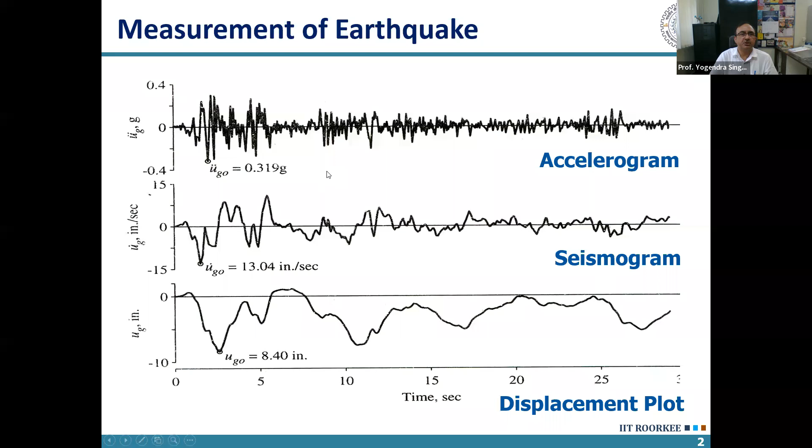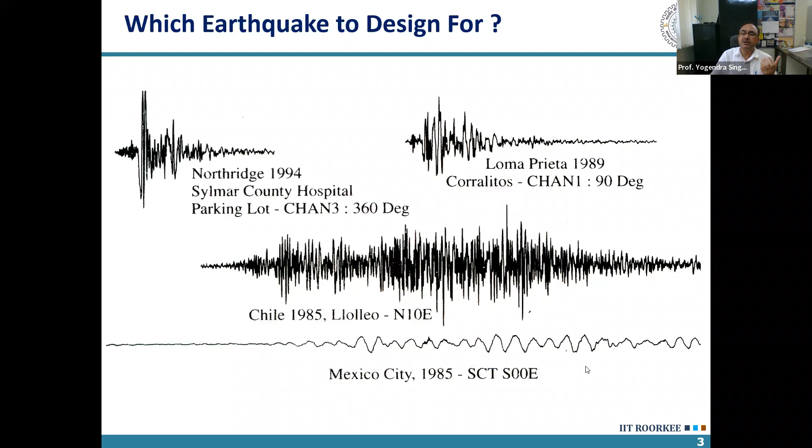So three important characteristics of ground motions have been identified. One is the amplitude of the shaking, the peak ground acceleration, or the peak ground velocity, or the peak ground displacement, because the amplitude is causing the magnitude of the force acting in the structure. So the magnitude of force depends on the peak ground acceleration. Similarly, the peak ground displacement results in the maximum displacement, which will occur in a flexible structure. So the amplitude is important.

Then frequency content: if the frequency content is such that our structure lies within the predominant frequency content of the earthquake, then the damage will be more. And lastly, duration. This is also important because damage is cumulative. When any structure is subjected to earthquake shaking, every spike in the acceleration is causing some damage, so every cycle is causing some damage to the structure. That damage goes on accumulating, and the accumulated damage will depend on the duration of the earthquake. So duration of earthquake is also important.

In most of our analysis, we do not consider the duration. Only in time history analysis, especially nonlinear time history analysis, does duration come into the picture. In other analyses, duration does not come into picture, and there we account for the amplitude of shaking and the frequency content.

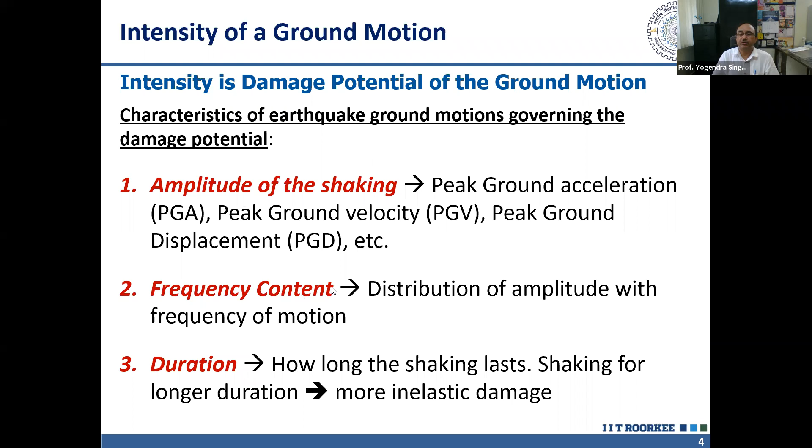These two parameters, the frequency content and amplitude, can be represented by the response spectrum. A response spectrum is nothing but a plot of the response of a single degree of freedom system subjected to earthquake. Some of you may be familiar with this single degree of freedom system, where we have a mass and either a spring or a single column. It represents a single story building where mass can be lumped at the top, and the column represents the stiffness. This column can also represent the damping, or the damping can be represented separately using a dashpot system.

And it is subjected to U double dot G. G stands for the ground, and U double dot stands for the second derivative in time.

So it is ground acceleration. When it is subjected to the ground acceleration, the mass undergoes some acceleration, and that acceleration is responsible for the inertia force in the mass.

So the force acting on our structure will depend upon U double dot, which in turn depends on U double dot G. But in our design, we are not interested in the inertia force. We are interested in the force acting in our column, because that is the force which will be applicable in the columns or the walls of our building, for which we have to design.

So this force which will occur here is equal to K into U, where U is the displacement. So K into U will be the force. If we do a little substitution, the maximum value of this force we can write down as the stiffness times the maximum displacement. This maximum displacement we represent by D, and K we can represent by m omega square. So a little simplification will give us that this force in the column, or the design force, this is m into A, capital A.

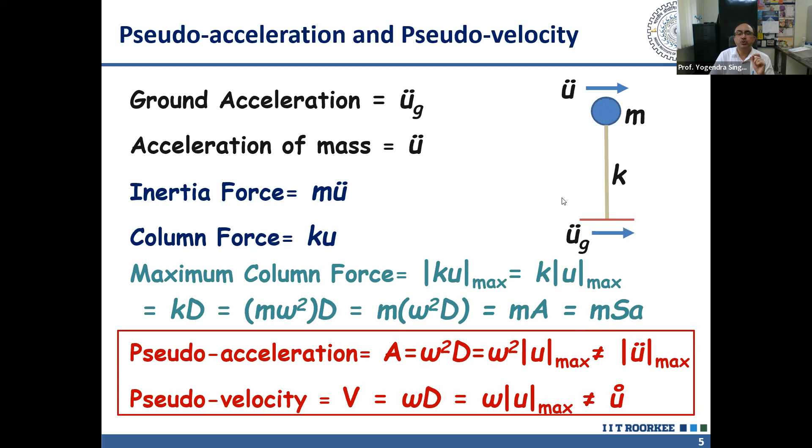So we plot this pseudo acceleration for a series of single degree freedom systems with their period of vibration. What we get is a plot, and this plot is useful to us because if we know the period of our simple structure, that may be a single degree freedom system or a single story building, then we can read the pseudo spectral acceleration directly from here. And that pseudo spectral acceleration, if I multiply by the mass, I will get the force for which I have to design. So this plot we call response spectrum.

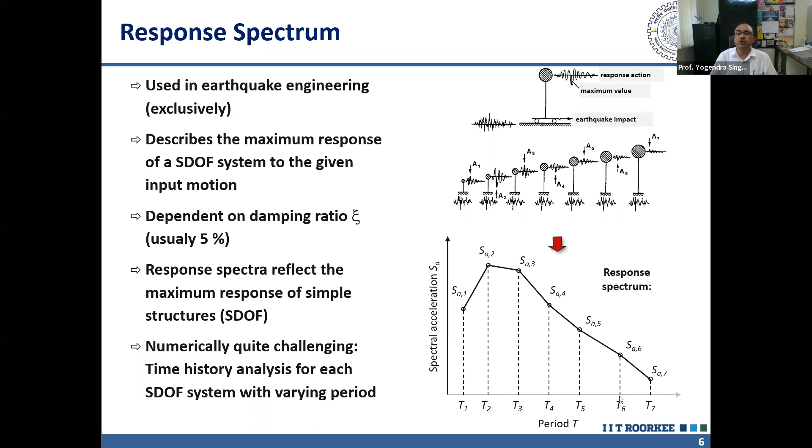It can be plotted for pseudo acceleration, or for any other response quantity such as displacement, in which case it is called displacement spectrum. It may be for velocity, real velocity or pseudo velocity, then we call it velocity spectrum. We can also plot for real acceleration, stress or strain. Any response quantity we can take. And if we plot it with respect to the period of the single degree freedom system, then we call it the response spectrum.

So if we plot the response spectrum for a given earthquake, the shape is something like this. For the El Centro earthquake, which I showed you initially in the first slide, the variation of the maximum displacement of the single degree freedom system with period is shown here. You can see it gradually increases with period. So this is the displacement spectrum for a single earthquake.

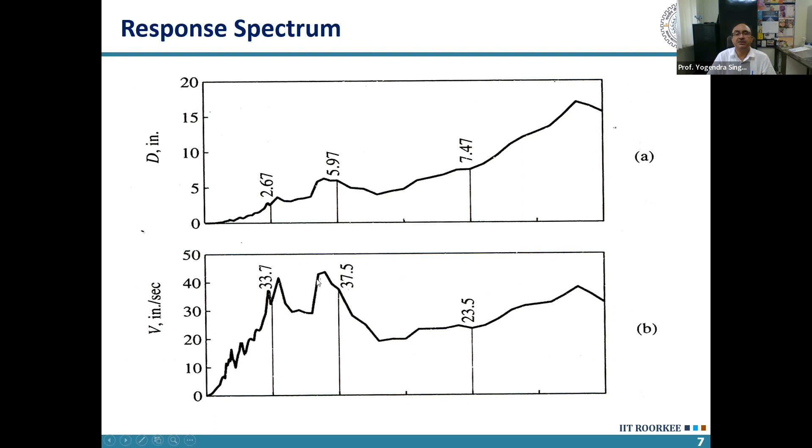In the same way, I can plot the pseudo velocity spectrum. Pseudo velocity is nothing but omega times d, and omega, the angular frequency, is 2 pi by T, where T is the period of vibration of the single degree freedom system. Then the shape is something like this: it increases, then attains a more or less constant value, and then reduces again. In the same manner, we can plot the pseudo acceleration, capital A or SA. Again, it increases with period, then becomes more or less constant, and then reduces. What we can see here is that for a single earthquake, it is quite zigzag.

So this is not a smooth curve, but rather a zigzag variation with period. But if we consider a number of earthquakes and normalize them, the most common way of normalizing earthquakes is using the ordinate corresponding to zero period. So this is also called zero period acceleration, or ZPA, or what is given as zone factor in our code is actually this ZPA. So if I take records of earthquakes in different regions, the ZPA corresponding to them will be different.

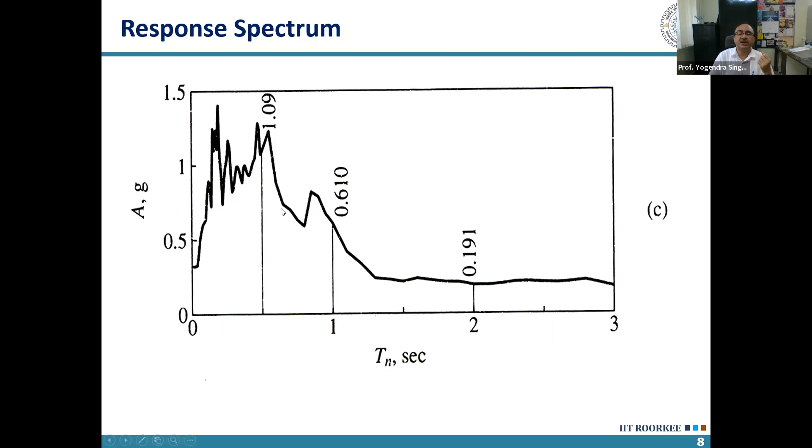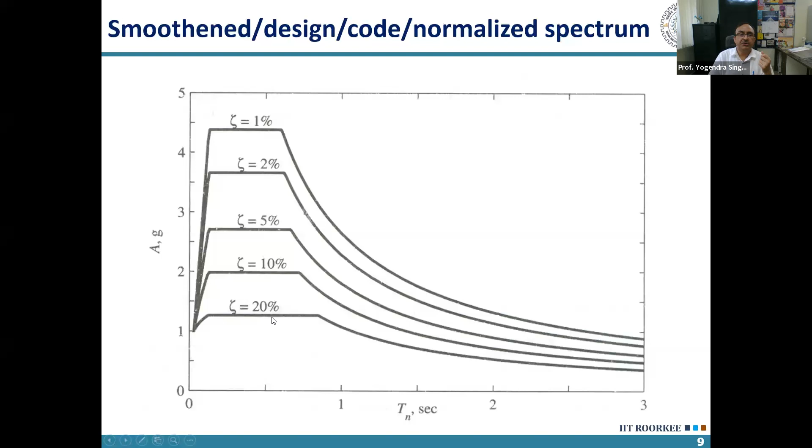...the shape or the ordinate of the normalized shape goes on reducing. What is given in our code is the shape corresponding to 5% damping. Some of you at least might have seen it. It is constant in the initial range, then it reduces proportional to 1 upon t, and then beyond 4 seconds it becomes constant.

And local soil, local site conditions also affect this shape. So what is given in our code are these shapes for 3 types of soil conditions: type 1, which is rock or hard soil; type 2, medium soil; and type 3, soft soil. You can see for soft soil the spectral shape is giving us the maximum ordinate. So the highest spectral acceleration we are getting in case of soft soil, and for hard soil it is the minimum. So as the stiffness of the soil reduces, the spectral acceleration at that soil goes on increasing.

Now you see that this increasing ordinate, which was shown in the response spectrum for a single earthquake, is not there. But if you look at the other figure in the code, which the code suggests to be taken for response spectrum analysis, there you can see that this increasing arm, or the first segment which goes up to 0.1 second, that is also included. Why is it not included in case of equivalent static method?

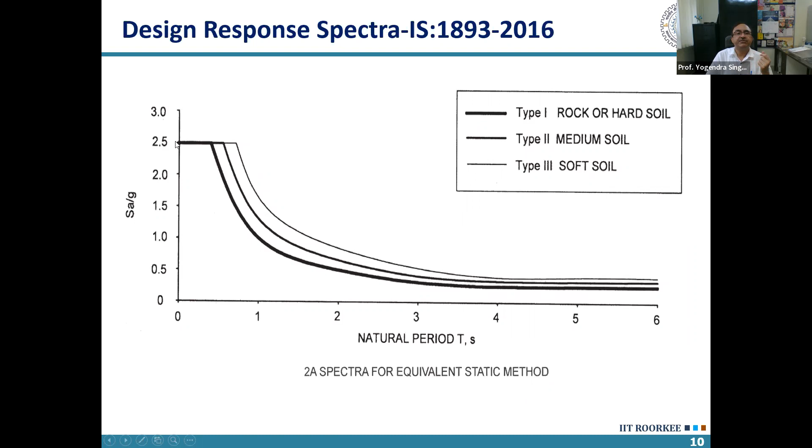So when we are performing equivalent static method, we are considering this graph flat up to zero period. And when we are considering response spectrum method, meaning actually a mode superposition method where we are considering a number of modes, then the period of the higher modes may be in the range below 0.1 second.

And in that case, the code allows use of the reduced responses, reduced spectral acceleration for periods less than 0.1 second. So that's why this range of the response spectrum from 0 period to 0.1 second is also included in this shape, which is to be used for dynamic analysis using response spectrum, or what we call multimodal analysis. Otherwise, both the curves are same.

Another issue in our code is that beyond 4 seconds, it takes the spectral acceleration to be constant. This is all right as long as force calculation is concerned, because structures having periods greater than 4 seconds have much lower spectral acceleration value, and those will be subjected to much lower force. So even if we consider this spectral acceleration constant, or the force acting on those structures per unit mass as constant, that is adequate, that can be adequately designed.

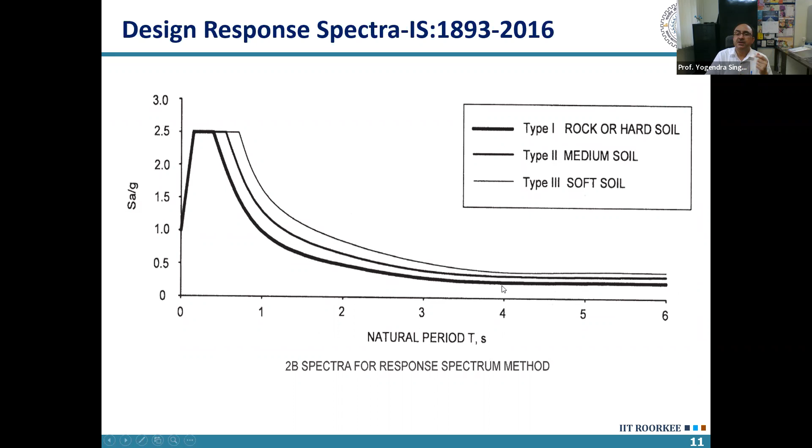It doesn't create much problem. But for the flexible structures, with the period of vibration being quite long, the total displacement which will occur in the structure may be erroneous and beyond the practical limits. That's why in the new revision of the code, which is yet to be published, the portion beyond 4 seconds has been modified. It is proportional to 1 upon t square, as it is there in other codes.

So if you look at ASCE 7 or Eurocode, here you can see that the response spectrum is divided into 4 ranges. The first range is this range in which it is increasing. Then there is a constant acceleration range. Then there is a constant velocity range, which is proportional to 1 upon t.

Beyond this period TL, spectral acceleration is proportional to 1 upon t square, since SD1 and TL are constants. So in this range it is proportional to, or rather inversely proportional to, t square.

In our code, it is taken constant. As a result, there is not much problem in spectral acceleration, but when we convert this spectral acceleration into displacement, we get much higher displacement, which may be difficult to design for in many cases.

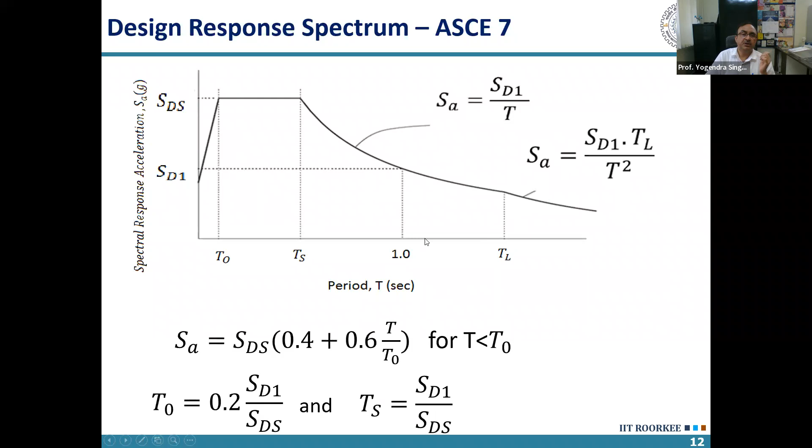Now another related question is, when we talk about earthquake, which earthquake or which level of intensity should I design for? So earthquake intensity is indicated in terms of its return period, similar to what we have in case of floods, where we assign average return periods.

The maximum earthquake which we consider in our design, and for which we do not want our building to collapse, has an average return period of 2,475 years, roughly 2,500 years. We want our building to not collapse even under this so-called maximum considered earthquake, or MCE, having a return period of 2,500 years.

This return period is also expressed in terms of probability of exceedance within the lifetime of the structure. Lifetime of the structure here is taken as 50 years. So the maximum earthquake we are considering for design has a 2% probability of exceedance in 50 years.

But we never design for this earthquake. We actually design for an earthquake with a return period of roughly 500 years, 475 or 500 years, called the design basis earthquake, or DBE. It has a 10% probability of being exceeded in 50 years.

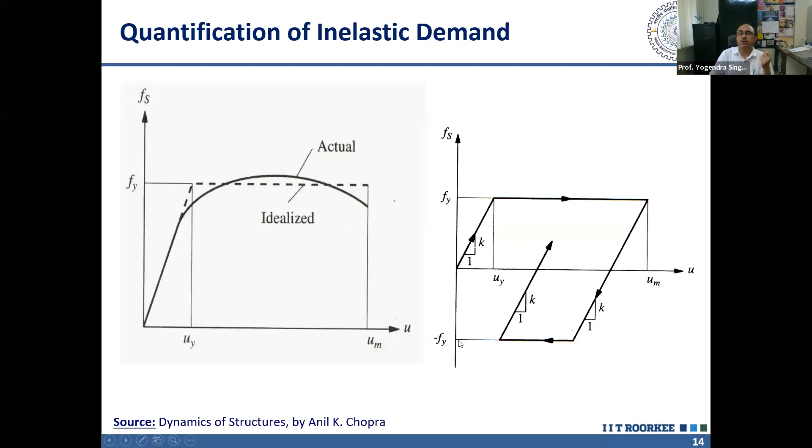In our conventional analysis, which you might have learned in graduation or post-graduation, we perform linear analysis, and that gives us the force demand on our structure. Usually we do not teach students the method to calculate ductility unless they are taking a course on earthquake resistant design. So in earthquake resistant design, we also teach how this ductility can be estimated.

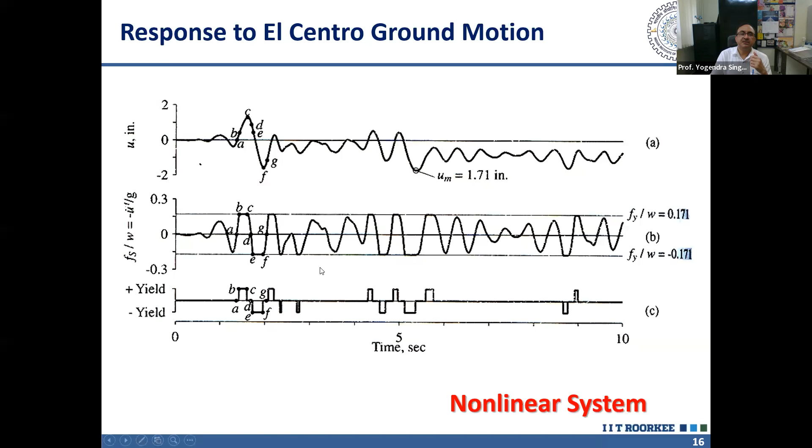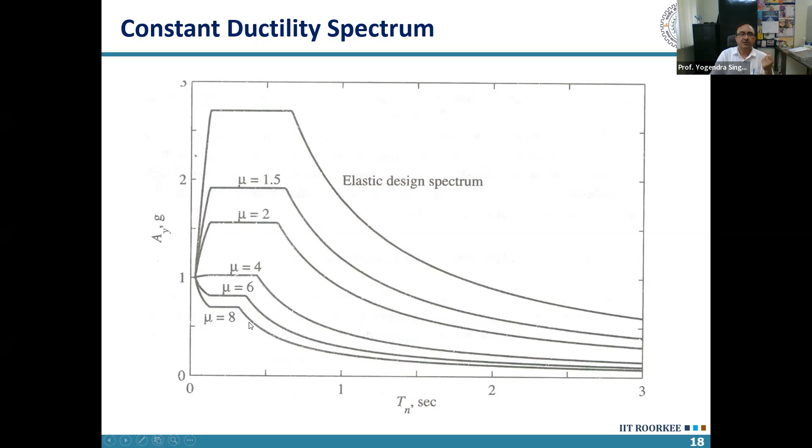With this background of earthquake and structural behavior, we can divide the types of analysis available into 4 categories. The first one is the linear static procedure, where we consider the structure to remain linear, and we do not consider the dynamic nature of the earthquake force. Rather, we represent it by an equivalent static method. This is also called single mode analysis. What is given in our code: the variation of the earthquake force is proportional to h square, meaning our first mode is taken proportional to h square. So it is also called single mode analysis.

Here we calculate the base shear, and then that base shear we distribute along the height. Period can be obtained from analysis or even using the empirical formula given in the code. So we need not perform any analysis for calculation of earthquake forces here. We can just use the period formula given in the code.

We can calculate base shear. We can read spectral acceleration from response spectrum, multiply that by weight, and then we distribute that along the height.

Then we can do linear dynamic procedure. Again, two options are possible: one is using response spectrum or mode superposition, the other is using time history. And time history also has two possibilities.

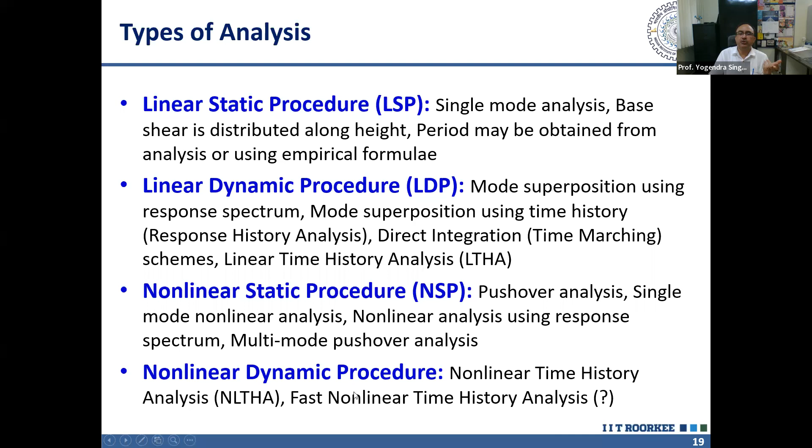This fast nonlinear time history analysis is approximate. In some cases it can give acceptable results, but in some cases the results may be quite erroneous, so we have to be careful which cases we use it for. As the name suggests, fast, it gives us the response very quickly, because we are not analyzing the full equation of motion. Rather, we analyze a single degree of freedom system, although nonlinear, corresponding to different modes separately.

In pushover analysis, or nonlinear static analysis, the building model is created similar to what you learned for linear analysis. The same model is subjected to a lateral force, distributed along the height in proportion to the fundamental mode. Whatever mode contributes maximum in the direction of vibration, we take force proportional to that mode, and the total of this force is represented by the base shear, which is the summation of all floor loads.

The behavior of the building under this load can be represented by a line, and it will undergo a displacement represented by delta roof. If I plot a relationship between base shear and delta roof, I get a straight line. This is the characteristic of a linear structure, so the behavior of a linear model will result in this straight line.

This is the response of a hypothetical structure which is very, very strong, stronger than the earthquake, but we naturally do not design for that much base shear. We design the earthquake for lower base shear. So what happens at a certain value of base shear?

Actually, some component in my structure will develop a plastic hinge, or it is going to yield. Let's say this member is yielding. How can we find which member is yielding? I can first take an arbitrary value of base shear, distribute it along the height with respect to the fundamental mode, and then perform an analysis.

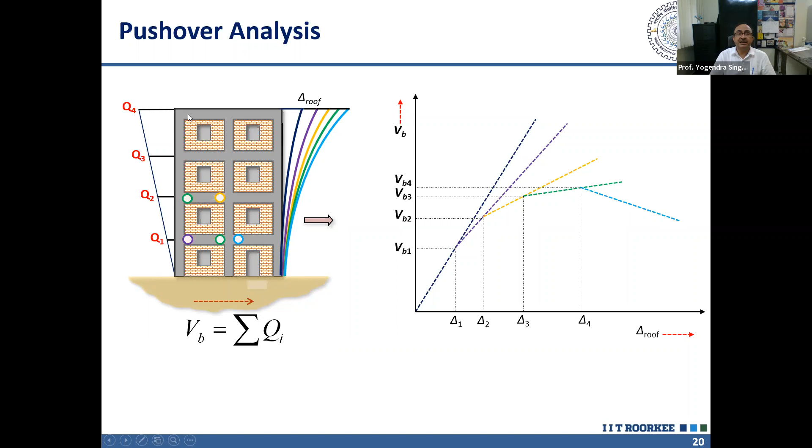Why will it become negative? Because of the P-delta effects. Because this building is already subjected to gravity load before applying this lateral load. So due to gravity load, as the displacement increases, the P-delta effects will go on increasing, and it may so happen that the stiffness becomes negative at a particular displacement. That means I have to reduce the lateral force rather than increasing it to keep it in equilibrium. And if I keep the force the same, the displacement will go on increasing and it will finally collapse.

And if I join these linear segments, which I have got between formation of different plastic hinges, this curve is important to us. This curve we call the capacity curve. This curve is representing three characteristics of the building. One is the stiffness - the initial slope is representing the stiffness. Then the peak value, the peak base shear, is representing the strength. And the ratio of ultimate displacement to the yield displacement is representing the ductility. So this capacity curve is able to represent stiffness, strength, and ductility of the structure.

And that's why we call it the characteristic curve, or signature of our building. Just like the accelerogram or response spectrum was the signature of the ground motion - the signature of the earthquake. It had no influence of the structure. In the same way, this capacity curve, or what we call the pushover curve, is representative of the building. It has no influence of ground motion. And what we have to do, if I want to estimate the response of my building under a given earthquake, is compare the response spectrum and the capacity curve. This procedure we call the capacity spectrum method.

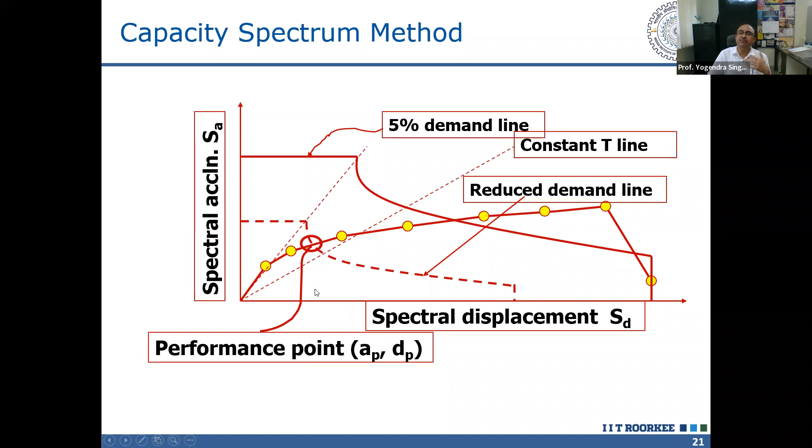So the displacement corresponding to this is the displacement which our nonlinear, inelastic structure will undergo during earthquake. This is the simplest method in which we can make use of the same model, provided we are able to calculate the capacity. So if we can calculate the capacity, the same model, the same computer program which we used for usual linear analysis, we can use for this.

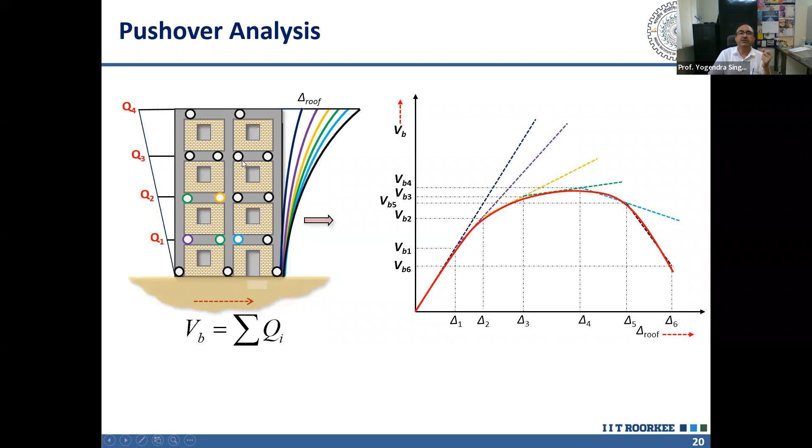Now several computer software packages have an option for performing this analysis, where you need not do the bookkeeping of when each particular point is yielding or where the plastic hinge is forming. All that is taken care of by the software itself.

Then coming to nonlinear dynamic analysis. In static analysis we are considering only the fundamental mode, only one mode. So it is an approximate method, and it is valid only for structures which have more than 75% mass participation in the fundamental mode.

In many structures that is not possible, and another limitation of this equivalent static method is that it does not consider the effect of duration. It does not take into account the accumulation of energy or accumulation of damage occurring in our structure over successive cycles of earthquake, successive impulses of the earthquake. This can be addressed by using time history analysis.

In time history analysis we select a ground motion. This ground motion must be selected carefully, and that is one important focus of today's talk. I will talk about that.

This ground motion, when applied at the base, makes the building start vibrating, and I can get a time record of the roof response. So I'm not getting a single value of displacement, rather I get a variation of displacement with time. I can read the maximum displacement from here, and that gives the peak response.

Now this response depends a lot on the input ground motion, so it has to be selected very carefully, and the analysis has to be performed for a number of ground motions. One ground motion is not adequate. Currently ASCE 7 says that when performing nonlinear time history analysis, at least 11 ground motions should be used.

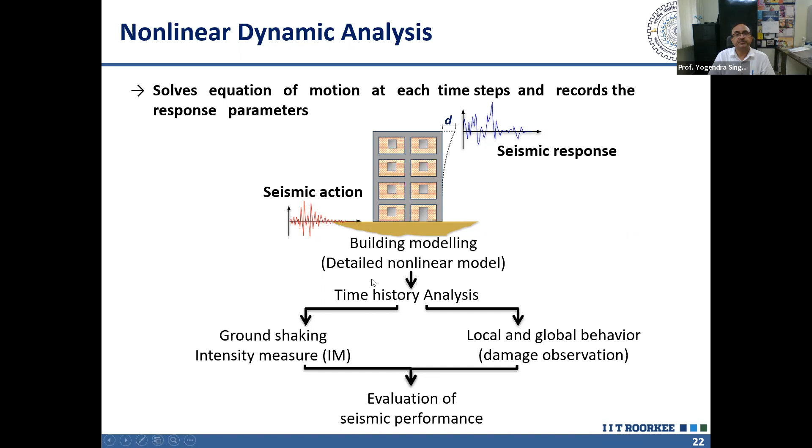The advantage of ground motion analysis is that we are taking the full history of the structural behavior into account, and we can go on changing the level of the shaking, that means the intensity of the ground shaking. We can get the behavior of the structure from elastic to inelastic range up to failure.

The problem in case of nonlinear time history analysis is that we have a lot of record-to-record variability. As I said, the ground motion response depends on the selected ground motion. Even if I'm taking different ground motions of same PGA, or even having same spectral acceleration SA corresponding to the fundamental period of the structure, there is a lot of record-to-record variability.

So this record-to-record variability is the issue, and that's why we have to select a suite of ground motions, not a single ground motion. Analysis is not done for a single ground motion. Earlier, you were thinking that 3 ground motions are enough, but now ASCE7, the recent revision, says that minimum 11 ground motions are to be used.

These 11 ground motions are to be selected from past earthquake records, because if we are using artificial ground motions, then there will be a lot of error in the response calculated. So it is suggested that ground motions should be selected from the database of past earthquakes.

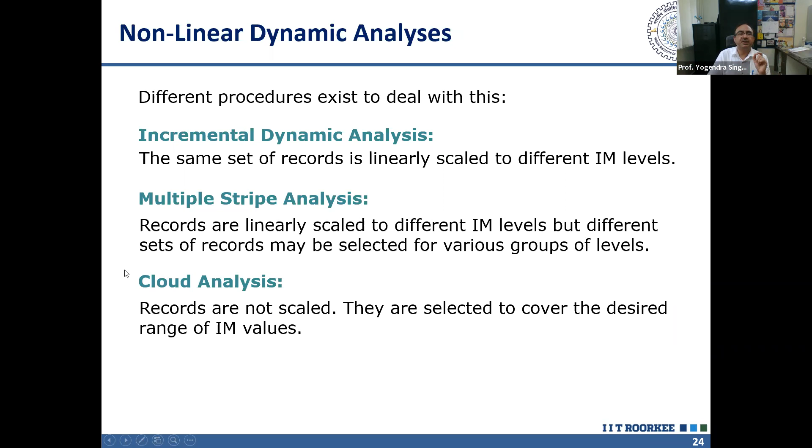The results of the three are to be interpreted differently. Then we have to perform nonlinear modeling of our structure. In case of nonlinear modeling for time history analysis, we have to not only specify its capacity in terms of strength and ductility, we also have to specify the full hysteretic behavior.

In ETABS, there is a model available which we know as fiber hinge. In this study, which I'm going to show you, we have calibrated that fiber hinge with experimental data. So it is important that whatever model we are using in nonlinear analysis, the model has to be calibrated with experimental results. For example, in case of a beam, we can use a lumped plasticity model.

That lumped plasticity model should be calibrated with cyclic testing results of beams. In our analysis for the beam, we calibrated the lumped plasticity model with the results of tests conducted in our department. In case of columns, because PM interaction is to be considered, the lumped plasticity hinge available in ETABS has some limitations in terms of the PM interaction curve.

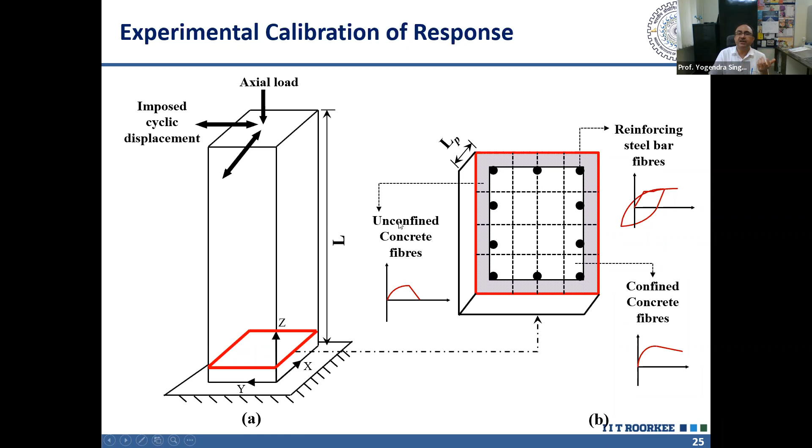But if we are using a fiber hinge model, then that PM interaction behavior can also be simulated. And at the same time, we can also simulate the hysteresis. There are some parameters controlling the behavior in ETABS. Using those parameters, we can control the hysteretic behavior of our fiber hinge.

Finally, it is the energy dissipated which is important, because as I told you, the energy dissipated per cycle decides whether our structure will be able to survive the earthquake or not. So the shape of this hysteresis is very important, and we should try to adjust these factors F, F1, F2, and S in such a way that our numerical model is able to simulate the hysteretic behavior close to the experimental behavior. That is the challenge in this analysis.

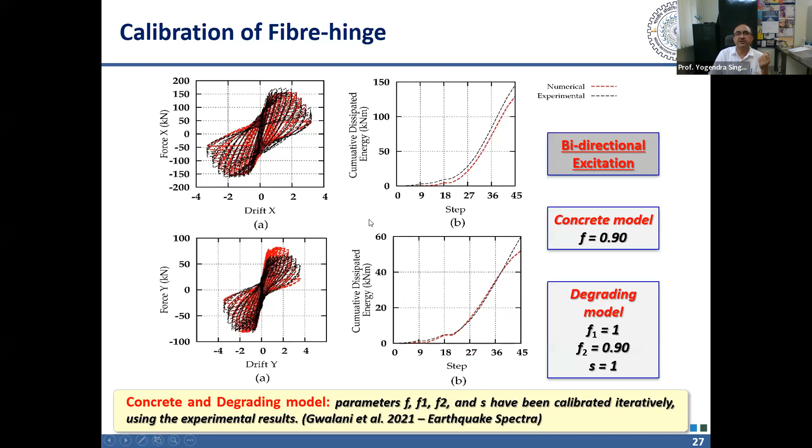We plot displacement, damage measure, and the intensity measure. Intensity measure can be spectral acceleration or some other measures I will explain. The damage measure can be either interstory drift or the plastic rotation in the members. Most commonly used is interstory drift. So if we plot spectral acceleration SA versus interstory drift, we will get a curve similar to the pushover curve.

This we also call the capacity curve, but dynamic capacity curve. What we get in pushover curve, we call it capacity curve or static capacity curve. But what we get using time history analysis or incremental dynamic analysis, we call dynamic capacity. There, when the curve was changing its slope, it represented yield. But here, when the curve changes its slope and shows a very large increment in displacement with little increment in force, that shows collapse. So this point shows the collapse, whereas the change in slope in case of pushover analysis was showing yield.

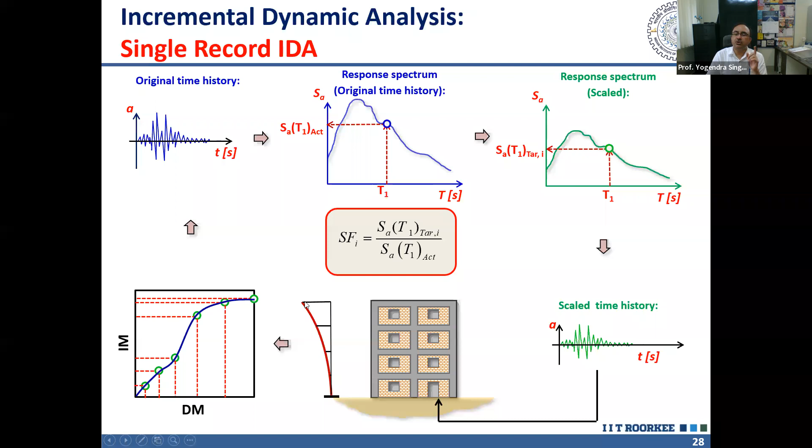In multi-stripe analysis, we take let us say 30 ground motions and perform the analysis of our building to these 30 ground motions. Then we will see that for some of the ground motions, our building is going to collapse, whereas for others, it can survive. So we go on performing the analysis for increased intensity, and we go on counting the number of time histories for which our building is collapsing. This gives us, out of the total ground motions, those for which the building is collapsing, and that gives us the collapse probability.

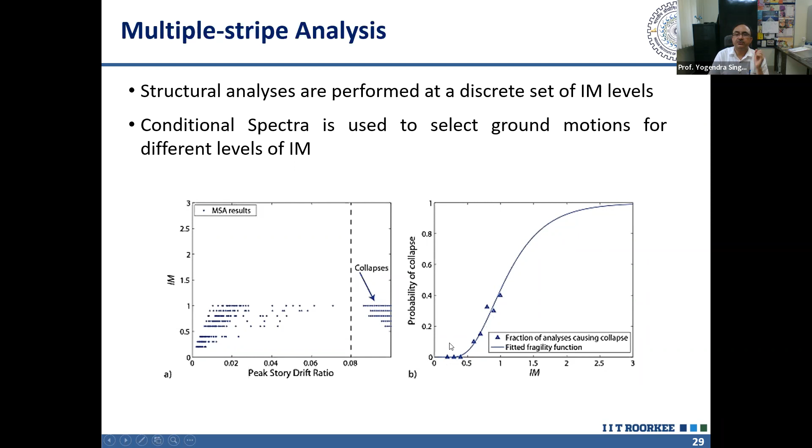We can plot this collapse probability against the intensity measure SA, and we will get a curve. This curve we call the fragility curve or the vulnerability curve of the structure, and we can read the probability of collapse of our building from here.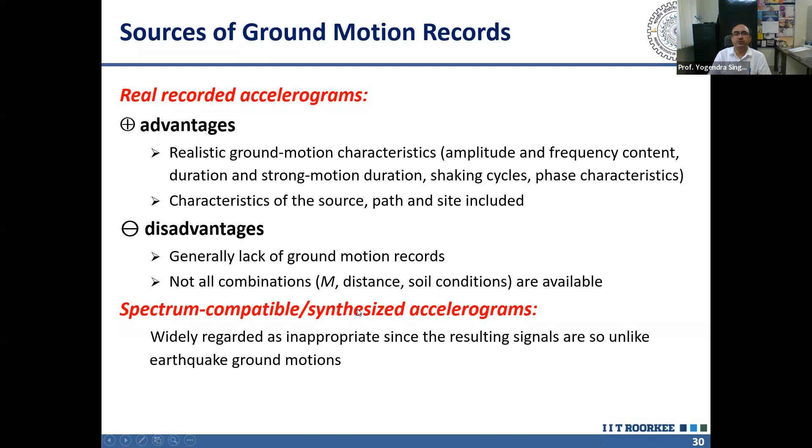The advantage of using ground motions, as I said, is that these represent the actual condition. The limitation is that we do not get an adequate number of ground motions, and in that case we do not have an option but to scale the ground motion. Sometimes we can use spectrum compatible or spectral matched and synthesized accelerograms, but these are considered inappropriate, only to be used when we do not have any other option and do not have the ground motions available.

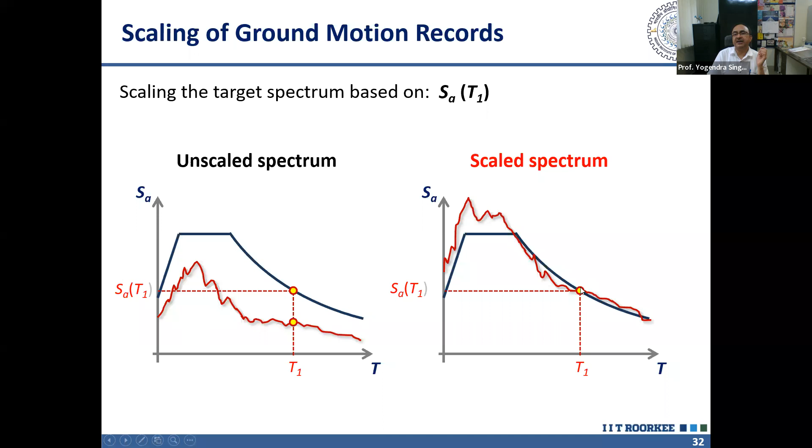So let me tell you how to do the scaling. In scaling, what we do is take the spectral acceleration corresponding to the fundamental period, and then multiply the ground motion by a factor such that it matches the targeted spectrum at the fundamental period. Just to show you an example, the left figure shows the original ground motions which we selected corresponding to a spectral acceleration, for a building having a period of 1 second.

When we scale it with the spectral acceleration, the shape changes like this. Some of the ground motions are scaled up, some are scaled down, because corresponding to our structure's fundamental period of 1 second, there is a wide range here. So the selected ground motions will never exactly satisfy the spectral acceleration you are looking for, so you have to do the scaling.

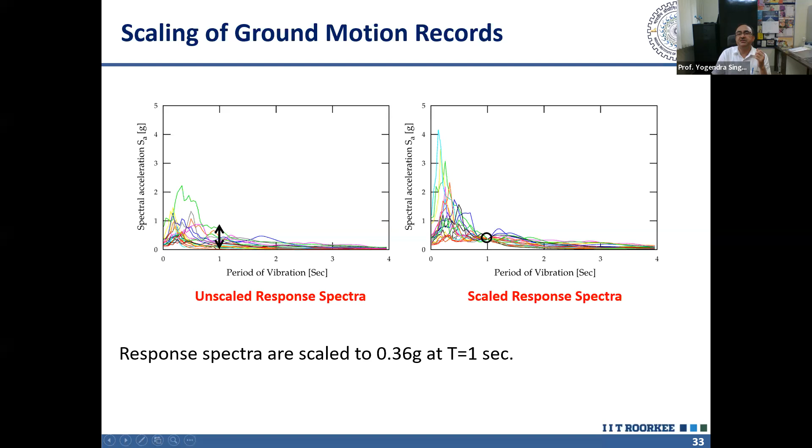What you see here is that these ground motions are matching at this point, but at other periods they have quite a large variation. Whereas in our structure, we need the ground motions to satisfy the spectral acceleration over a range. One reason is that we have multiple modes participating in the response of our structure. The fundamental mode has maximum contribution, but the higher modes are also contributing. The fundamental mode T1 has the longest period among all, and the other modes have shorter periods, so the left side range of the response spectrum from the fundamental period comes into picture because of the higher modes.

Then when our structure is yielding, its effective stiffness is reducing, and due to this reduced effective stiffness, its period is elongated. So we have a period shift, meaning the effective period is longer. So we need a range on both sides of the fundamental period, larger than T1 as well as smaller than T1, in which our ground motion should be close to our targeted response spectrum if we want the results to be reliable.

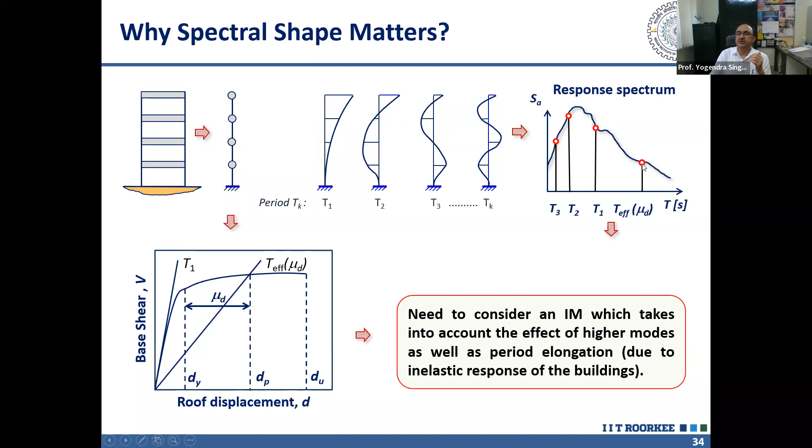This can be done using SA average. This SA average takes into account the shape of the response spectrum in a range, from 0.2 T1, representing the fundamental mode, to 3 T1. Why 3 T1? Because of the period shift - the period elongates when the structure gets damaged and goes into the nonlinear range. And 0.2 T1 because higher modes are also contributing, and we should take all modes which have up to 90% mass participation.

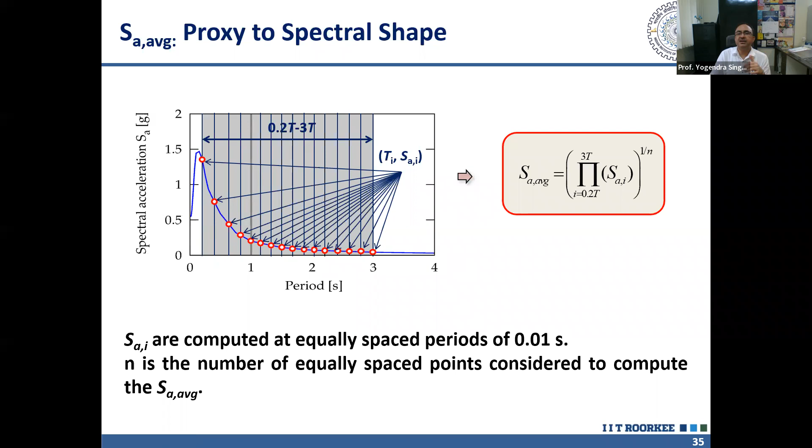In between, we take ordinates at an interval of 0.01 second, and take the geometric mean of all these ordinates. Then we use SA average to scale our ground motions in place of SA at T1. SA at T1 was considering spectral acceleration at one period only, whereas SA average considers this range at an interval of 0.01 second and takes the geometric mean of those values. If we use this, the variability in the response is going to be much smaller.

Now here I have some websites from where you can download ground motions, and using these, the most important one is PEER NGA-West2 by University of California, Berkeley.

Most of the earthquake records recorded world over you can find here. Our department is also maintaining a website where you can find the strong motion recorded within India. Those are available on this. And all these websites are in public domain, free for anybody to download the ground motions.

This NGA-West2 also provides a search engine using which you can select ground motions corresponding to your targeted response spectrum. Suppose you are selecting ground motions corresponding to an MC spectrum. You generate the MC spectrum at your site, give it to NGA-West2, and it will give you the best fitting ground motions, the ones having the response spectrum closest to your targeted response spectrum.

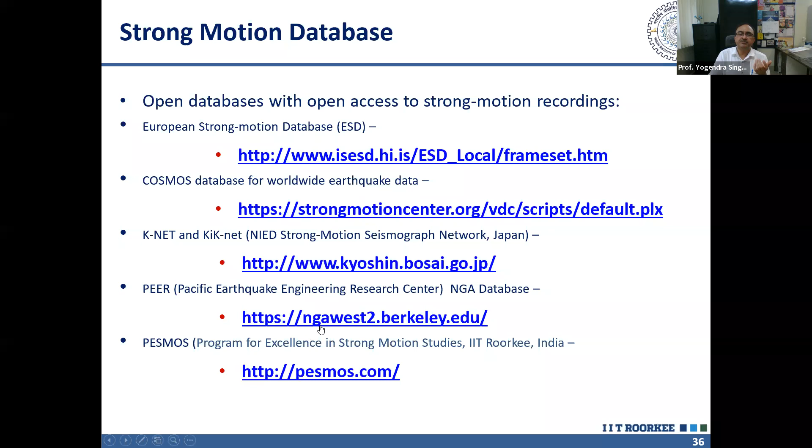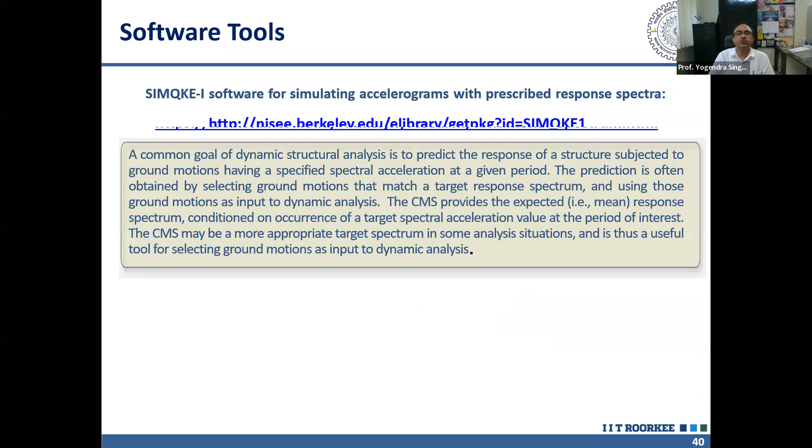Then there are some software tools which you can use for scaling or spectral matching of the ground motions. These are also in public domain, you can download and use those. Quake Manager is another such tool. I have given the PDF file already to Dr. Praveen Kumar, he will share it with you.

The last topic I wanted to discuss is the so-called fast nonlinear analysis. In linear analysis, we use mode superposition, and using mode superposition the computational time reduces drastically. The problem with nonlinear time history analysis is that it takes a lot of time, it is very computationally exhaustive, requiring a lot of computer time. It is usual to run your structure for weeks, if not months, to perform nonlinear time history analysis even for a moderate size structure. So people are looking for methods to obtain the approximate response quickly.

This fast nonlinear analysis is included in ETABS and SAP. Although mode superposition is not strictly valid in nonlinear analysis, they assume it is valid, and they use Ritz vectors in place of eigenvectors. In most cases, eigenvectors and Ritz vectors will give identical results, but in some cases Ritz vectors can give better results.

So you can try with eigenvectors. Eigenvectors are nothing but the frequencies and mode shapes you are getting, those are the eigenvalues and eigenvectors. Similar to those, there is another set of orthogonal vectors which we call Ritz vectors. This takes into account the characteristic of the load, the seismic load, and that's why it has been seen that in some cases Ritz vectors result in more accurate response with the same number of modes.

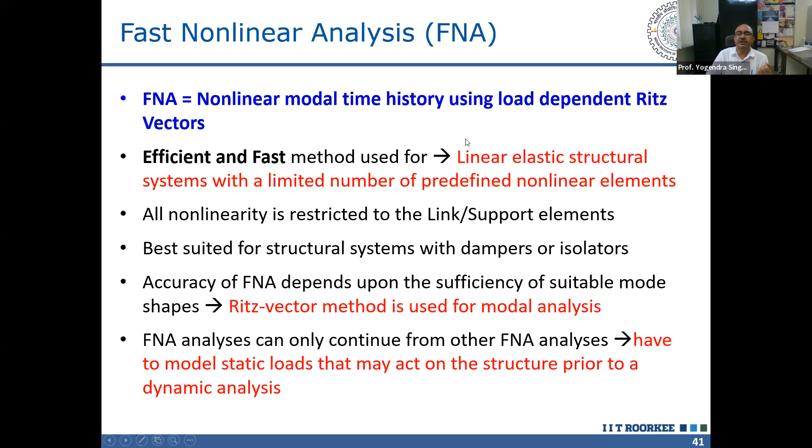The building is represented by several nonlinear single degree of freedom systems of different period corresponding to different modes. The analysis is performed on this set of single degree of freedom systems rather than the actual multi-degree of freedom model of the structure. Since it is a single degree of freedom system, the analysis is quite fast and we get results quickly.

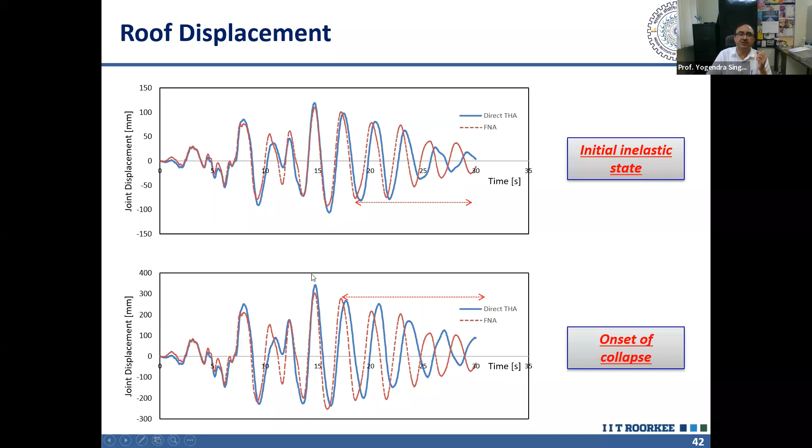We performed the analysis under two conditions: the first close to yield, where the level of inelasticity was low, and the other where the level of inelasticity was large. You can see that the peak roof displacement in both cases is quite reasonably estimated.

The roof displacement is more or less the same, but in the story where the plastic hinges are taking place, the difference in the estimated response may be much larger. So it is not really valid at that stage. But if the nonlinearity is limited, then this fast nonlinear analysis is quite a useful tool.

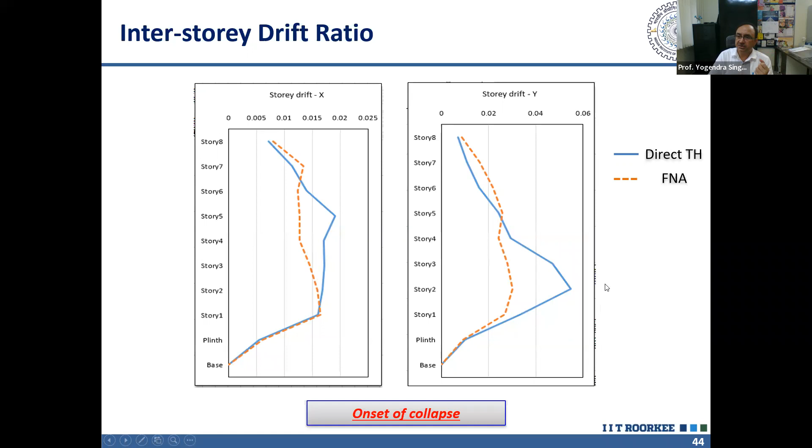Very quickly you can get to time history analysis results, for which you would otherwise require weeks. Here you can get it in minutes. So that way it is very useful. So thank you, that's all I wanted to discuss.

Different methods for estimating seismic response using the software commonly available in our industry. We can use these methods.

Thank you. And if there are any questions, I think questions have been recorded by you in question answer. Yes sir, we have already recorded a few questions. Okay, so yes, maybe you can read the questions. I will try to answer.

Sure, sir, many thanks for the informative lecture and for covering the different aspects related to seismic loading, methods of linear and nonlinear analysis of structures, and estimation of structural response. Sir, it is really a great learning experience for all of us. And I see a few questions from the participants who are eager to discuss with you. I now request Dr. Praveen Kumar Venkatrao, sir, to please read out the questions to Professor Singh.

Thank you, Vishwanath. Sir, we have several questions from the participants. I would like to read them one by one.

There is a question from Mr. Ahmed. He asks, generally what ductility demand do we use for concrete buildings? Is there any quantitative value?

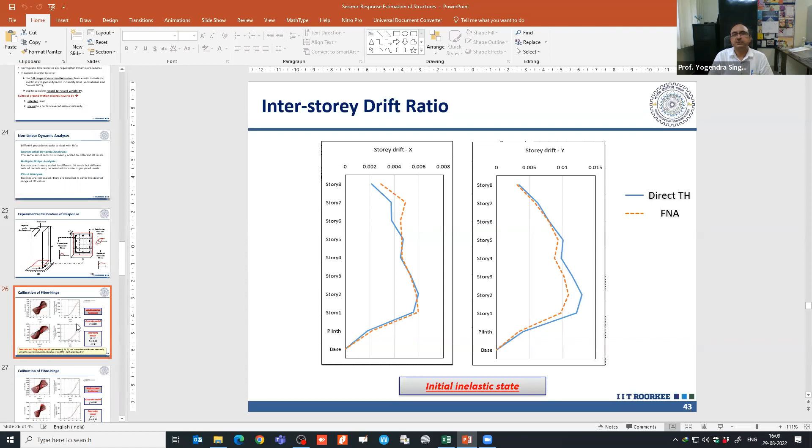For a hysteretic model, you need two inputs. One is the backbone curve, which is the envelope, and you can get that from ASCE 41. Whatever values are given in ASCE 41 are on the conservative side compared to experiments, but those can be safely used. So that will give you the backbone curve.

But that doesn't tell you how the loading and unloading will take place. In time history analysis, we need the full hysteresis model, so for that we need these additional parameters, to be used in addition to what is given in ASCE 41.

The next question is, what is the fundamental difference between far field and near field earthquake? Near field ground motions are close to the epicenter, in the epicentral region, and far field are away from the epicentral region.